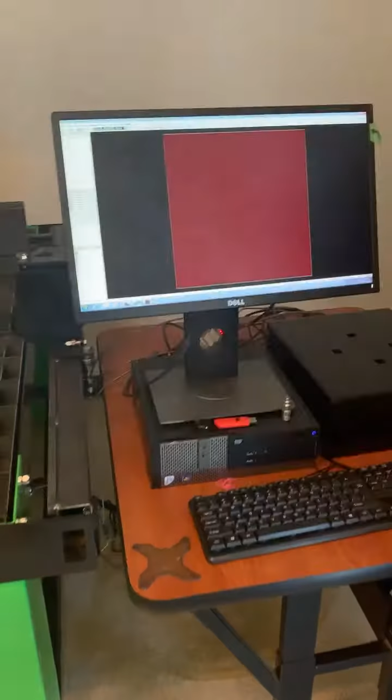You're gonna have ViaCAD, which is gonna be the V9. This is gonna be like the CAD software where you can do all kinds of custom parts and everything in. So after you make a part in ViaCAD, you're gonna export it as a DXF. You're gonna bring it over to sheetCAM. And sheetCAM is basically where you're gonna tell it how fast you want it to cut, your inside and outside offsets. And then you're also gonna be able to nest.

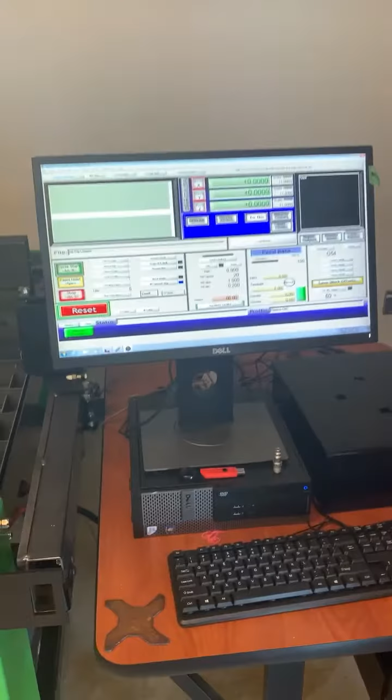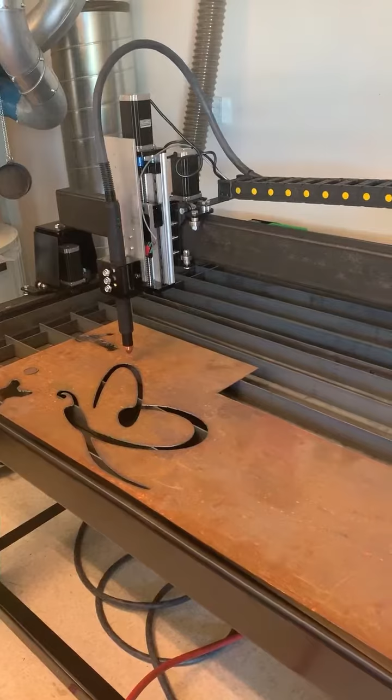And then after you get all that done, you'll be able to post-process and create a G-code that's gonna run on the table. So after you do that, then you go over here to Mach 3, you do your load G-code, which is gonna be right here. So you bring your part in, you move the arrow keys right here to move the torch around. So let's say you wanna start right there. You're then gonna want to zero your X, Y, and Z, and you'll basically hit start to cut it out. So that's just like a general step by step.

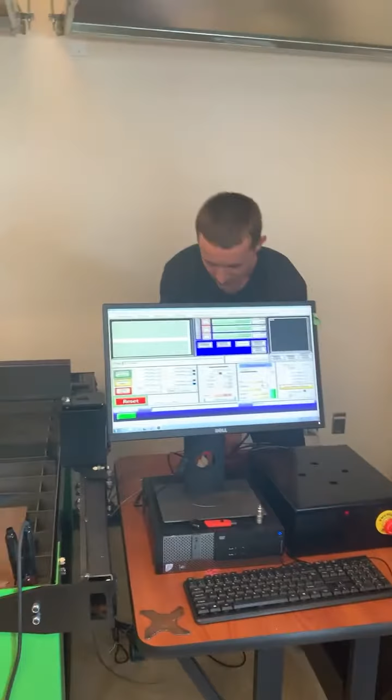So what are you doing now, Jake? I'm just gonna hook the torch height controller up real quick. And what is the torch height controller? Basically what the torch height controller is gonna do is it reads the tip voltage between the metal and the tip. So basically when it starts to get too close, it'll read a lower voltage. So it knows it's gonna need to raise up. So basically it's kind of like continuity.

When two objects get closer together, when you have power going through them, you're gonna have a higher power flow versus when it gets further apart. So when it's cutting, if the torch starts to get too far away from the metal, it's gonna know to drop back down. But it'll be better when I get it cut to kind of show exactly how it works.

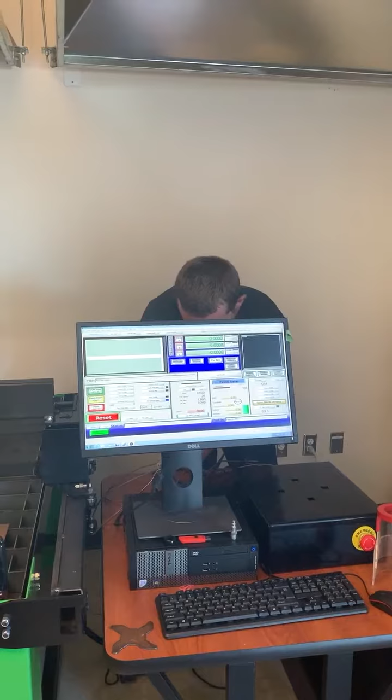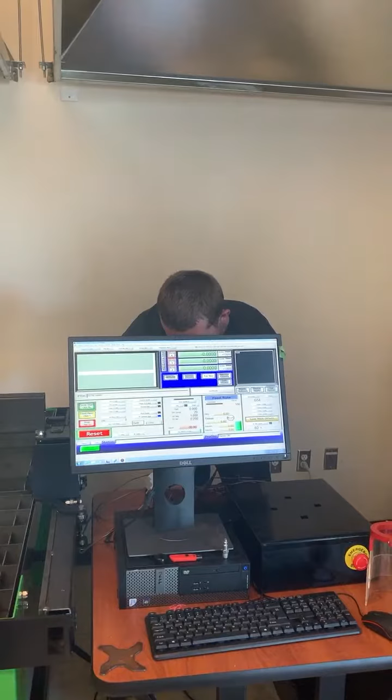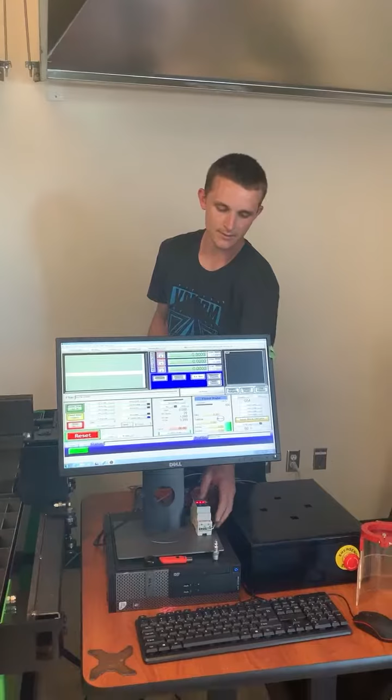You can extend that with a little piece of wire if you need. Okay. Yeah. If we have a thicker piece of metal, are we gonna tweak the numbers on that? Yeah. Do you know where the manual is at for the cutter? Should be one of these.

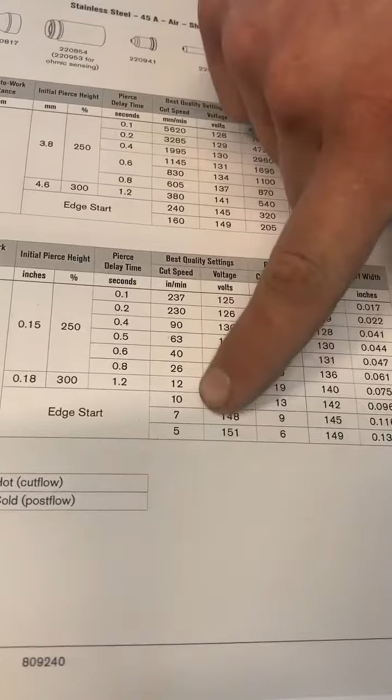So basically, I'll show you guys right here. So you have your different metal thicknesses. And then this is like your cut speed, how fast it'll cut. So like at 14 gauge, the THC voltage should be set at 126 volts. So to do that, you just hit the up arrow. Now it's set at 126. So that's gonna be the correct height for cutting that thickness of metal.

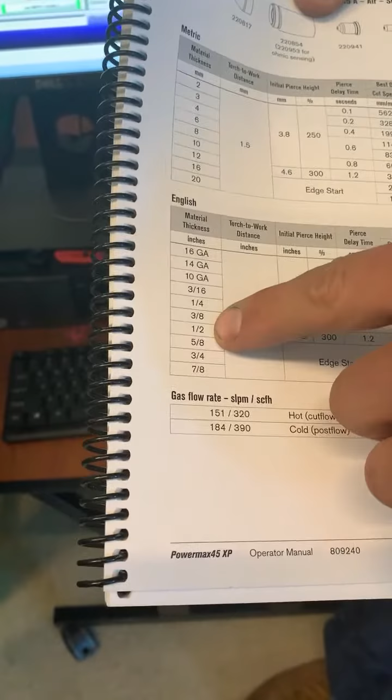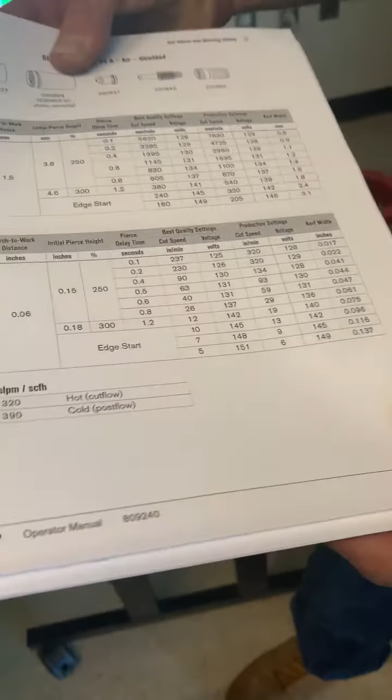All right, now we're gonna go to ViaCAD. So as far as ViaCAD, you got a real easy, friendly toolbar right here. But then if you want all your other tools, click down and hold. Then you have your polygons and all those kinds of shapes. Down here too, you got your rotate, your scale, your mirror, your duplicate.

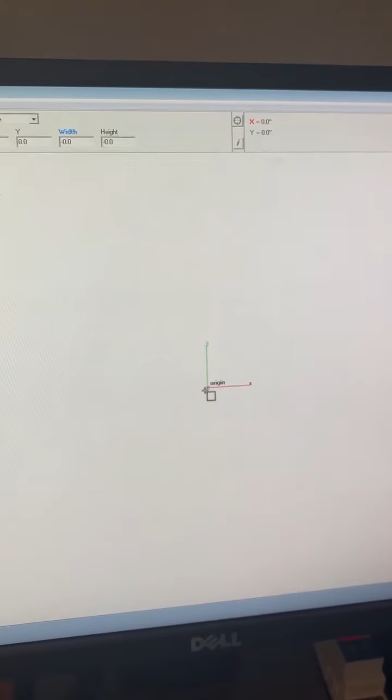We're gonna click right here on the square tool. Go down to our origin for X, Y, and Z. Click and drag out. And then right here we can put our dimensions. So let's say we're gonna do a 5 by 5 square. So we'll do 5 inches width and 5 inches for the height. So now if we were to send this right now to the table, it'll cut a 5 by 5 square out.

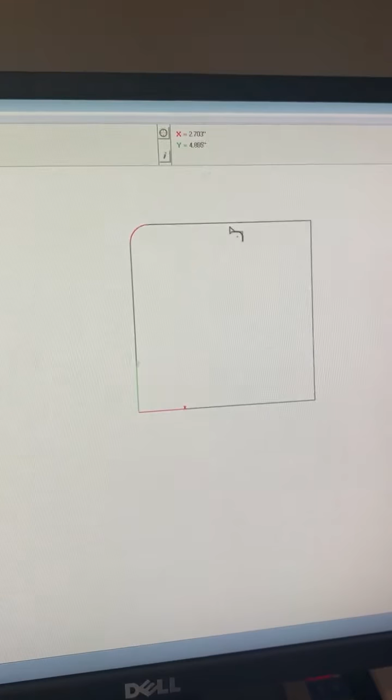Now let's say we want to do a couple of radiuses on the corners. We're going to select the radius tool. We'll do a 1/2 inch radius. So for that, we're going to click on each corner to give it a radius. Now after that, we're gonna have our single circle right here. Well, it's a circle 1 point. You have a lot of other types of circles too, but this is just the most commonly used one. We'll do 3/8 diameter, so we'll do 0.38.

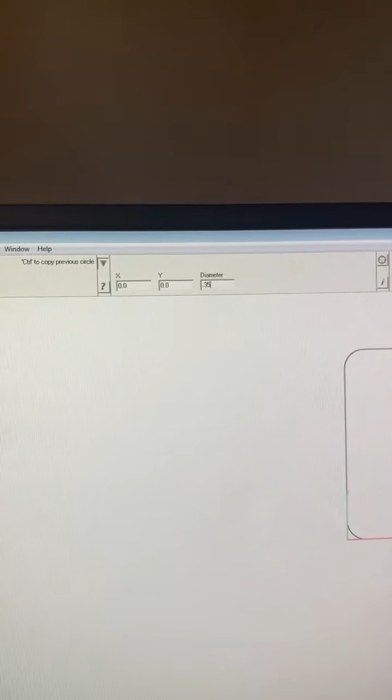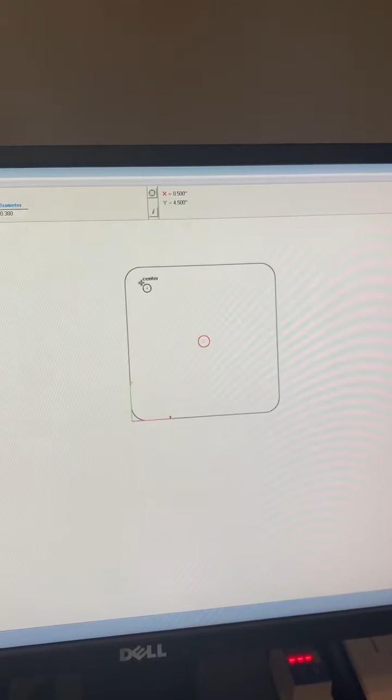Now let's say we want to put a hole right in the center of this. It's gonna be kind of hard to find it, so we're gonna go over here, find our midpoint, hover over it, hover over this midpoint, then it's gonna give us our crosshairs. And then now since we did a radius, we can find the center of this radius to drop them in. So there's our center right here. So if you get the mouse close to something that might be commonly looked for, it's gonna find it for you? Yeah, it's gonna automatically put it right there.

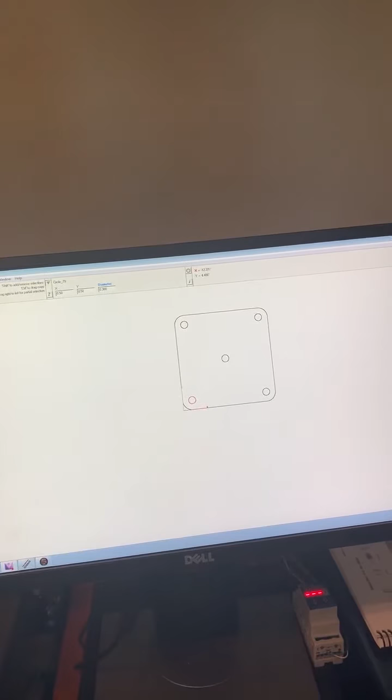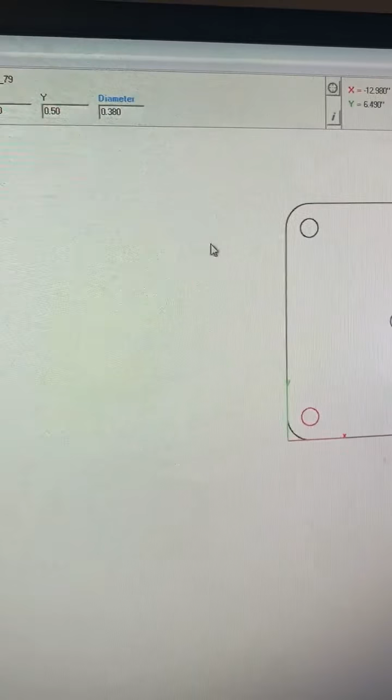That's cool. So let's say that's our part. That's like a 4-hole base plate, if you needed a piece of pipe right here and then fasten it to the floor. So we'll go to File, Export. This is where we're gonna export it to go to SheetCam. We're gonna do DXF. Now you can export it in all these other file formats also, but we're just gonna use DXF. We're gonna hit OK. Now we'll save it. We'll just name it a 5-hole square. So we're gonna save right here to our desktop.

Then we're gonna go here to SheetCam. Now we're gonna bring our part into this. This maroon square represents the bed of the table. Okay. So if there's a full sheet of metal on the table, you can fill up this whole thing and cut it at once. To bring a part in, we're gonna go to File, New Part. Do you want to import a drawing? We're gonna hit Yes.

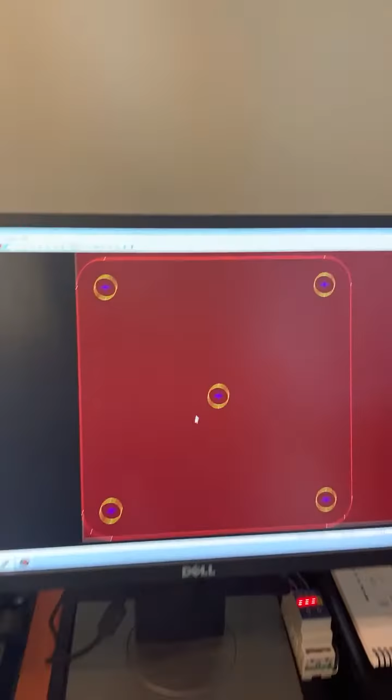On our desktop, we're gonna go ahead and look for that file. There it is right here. We're gonna open that up. Inches, bottom left corner. We're gonna hit OK. So there's our part. If we zoom out now, let's see. So there's basically the part on a whole sheet of metal.

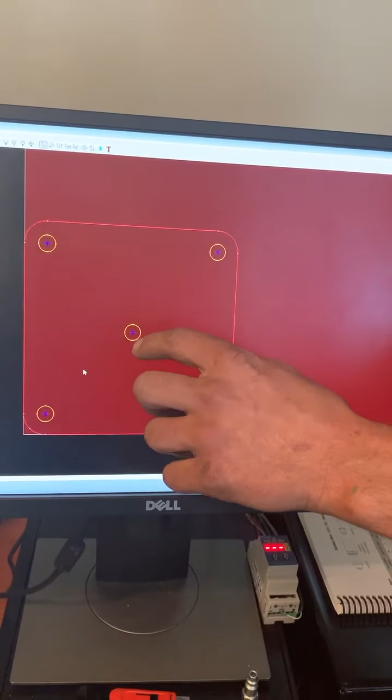Now what we're gonna want to do is create an operation. Basically the operation is gonna be our tooling, so it's what's gonna tell how fast we need to cut. We're gonna want to do an inside lead in. So basically what that means is it's gonna start from the inside of the hole and then go out to cut instead of cutting right on the edge and burning a hole. So when you're cutting, you have to sort of think about what you want saved. So we don't want it to cut right on this yellow line because that's the dimension.